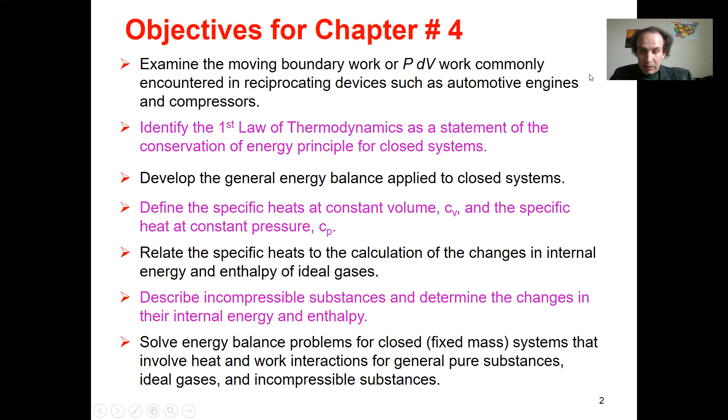So what you must remember, what's the classical mistake? If you identified state 1, you still know nothing about state 2 and other states. You should solve this problem from the very beginning for state 2, state 3, and so on. Please don't confuse. Read the text body and try to identify. So that's what we did in chapter 4. In chapter 4, we employ the first law to a closed system and solve some problems.

So how does the first law look? I recall, we simply say that it's energy conservation. For a closed system, mass cannot go in and out. So we say that energy change in a system is energy propagating through a boundary. And it can go through what? Through heat and work. Remember, heat is something related to temperature difference, and work is everything which is not heat. This is our definition in thermodynamics.

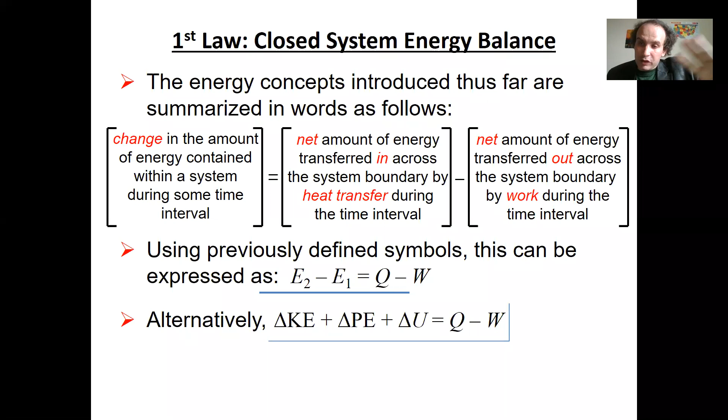We don't talk about boundary work here. We talk about work in general. It can be stirring work. It can be an electric heater. It can be a mixer, any kind of work. Remember the sign convention, Q minus W. If you get passive voice and active voice, classical mistake. Q is positive, W is negative here.

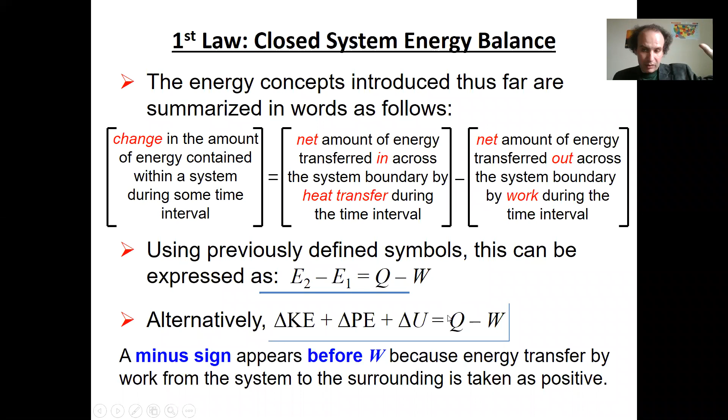If heat goes into the system, it's positive. If work is done on the system, it's negative. If work is done by the system, it's positive. If heat is released from the system, it's negative. Please remember. In differential form, it looks like this, right? So that's what I request you to remember. Yes, there are some questions I will address.

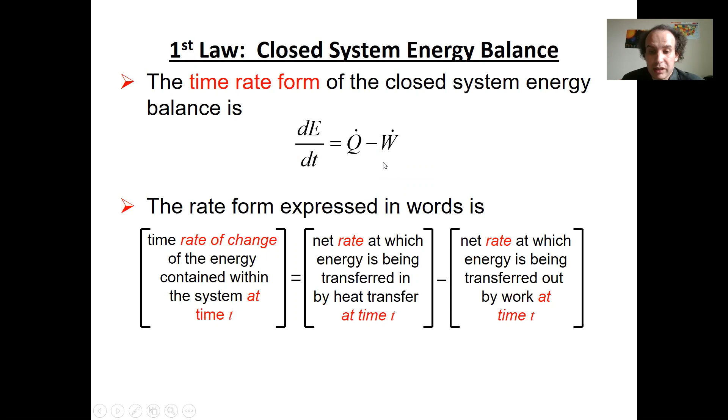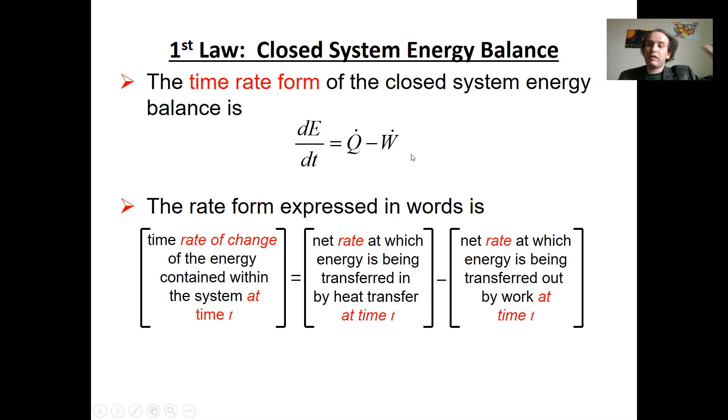So I want to go briefly through these basics, and then we will talk a little bit more about the exam, and I can address some of your questions. So that is the first law for a closed system, right? That's how it looks. Again, I recall here W is work, and it can be electrical work, it can be any kind of work, plus boundary work. And boundary work is one of your major focuses here, when you have a piston cylinder assembly, when this piston goes up and down.

So what you remember, again, heat and work are not properties, right? Why are they not properties? Because they don't depend on state, they depend on the process. Like I say, every instant I can ask you how much you have in your pocket, on a bank account. And if you want to share, you can say this amount. But I cannot say how much you spent instantaneously. You don't spend instantaneously. It's a function of time. The same story here. Heat and work, it's what changes with time.

And we are lucky because of this, because there is no conservation of work and there is no conservation of heat. There is only conservation of energy. So heat can be converted into work and work into heat. And that's why we can use it. And that's how our whole manufacturing works, how the steam machine works. We manage to convert heat to produce work.

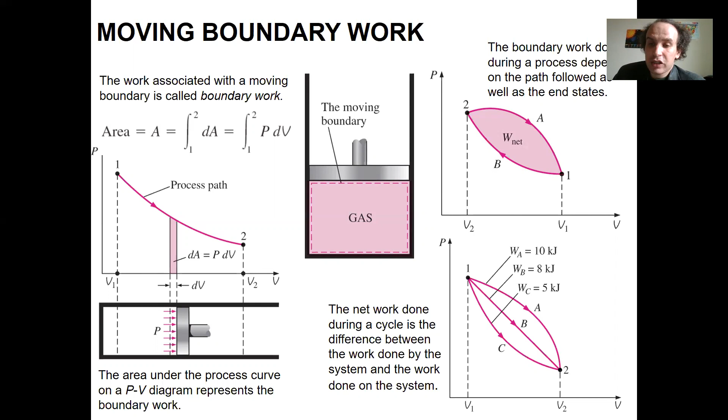Now, so this is one equation that we consider. We discussed several equations, right? So another equation, how the equation of the process looks. And we discussed polytropic processes. So what is polytropic? It's a process which looks like this: PV to the power n is constant. Why do we talk about polytropic processes? For two reasons. One, because it's mathematically nice, it's easy to integrate. If you calculate boundary work, it's easy to integrate this polytropic. True?

Second, because most of the simplified processes we deal with, iso processes, are polytropic. So in this equation, n is what we call the polytropic index. It's some constant, it can be arbitrary. It can be 0, it can be negative, it can be 100, it can be square root of 2, whatever it is. And you should be able to find it, or it will be given in the text. But in fact, most of the processes we deal with are polytropic.

So if n is equal to 0, we have an isobaric process. If n tends to infinity, we have an isochoric process. Now, if n is equal to 1, generally speaking, it's nothing, but if you have an ideal gas, it will be an isothermal process. And remember, when we talk about specific heats, again for ideal gas only, if n is equal to k, Cp over Cv, it will be adiabatic. So please remember how to deal with polytropic processes.

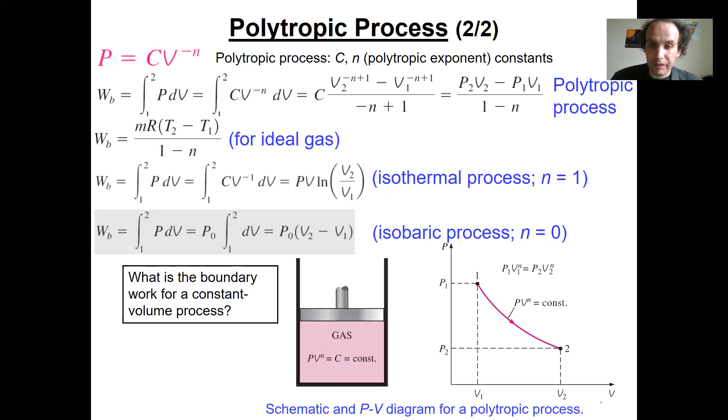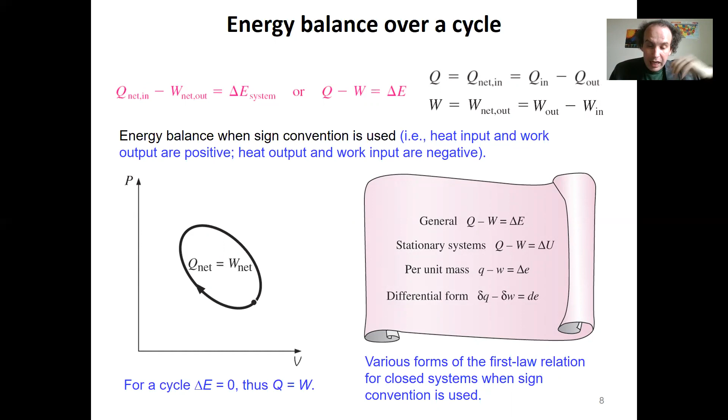Now, if you have a cycle, remember for a closed system, heat transfer over a cycle is equal to work transfer over the cycle. That's important to remember. That's how all our devices work. So there is no separate conservation of heat and work; they are coupled. If you have a power cycle, where the system consumes heat and generates work, like a steam machine, they are both positive. If you have a refrigeration cycle, where you transfer heat and consume work, they are both negative, but they are equal.

Remember, we talk about specific heats. What are specific heats, Cp and Cv? Remember that since heat and work transfer depend on trajectory, it depends what process you look at. And remember, in isobaric and isochoric processes, these are different. So generally speaking, what is specific heat? What is heat capacity? It's how much energy you need to increase or decrease the temperature of 1 unit of mass, or 1 mole, or 1 kilogram by 1 degree.

And remember, Cp and Cv are different. Remember how we define it. And basically remember that we classically derive why we talk about Cp and Cv. Because there is a nice expression that Cv is given by the internal energy derivative, Cp is given by the enthalpy derivative, right? And why is it nice? Because enthalpy and internal energy specific values are in your tables. They are properties, which makes Cv and Cp also properties.

They also depend on state. They are not functions of the process, so they are tabulated. You can get them from the tables. And we discussed many things, how to deal with it. And remember, for ideal gas, we have the classical, very nice Mayer relation. So Cp minus Cv is equal to R.

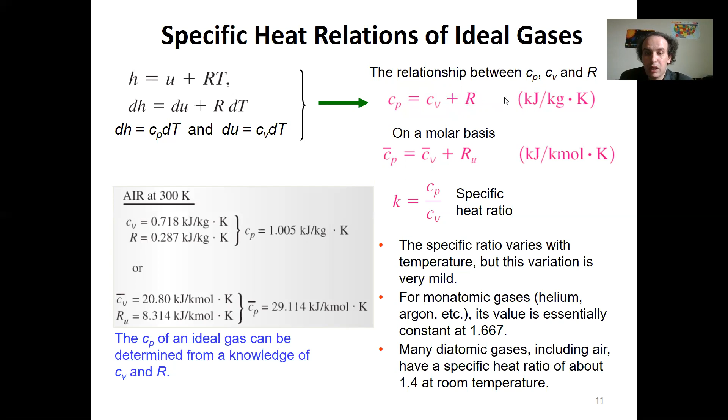If you talk about solids and liquids, this is not the case. For solids and liquids, remember, it will be something like this: Cp is about equal to Cv. That was chapter 4. And then we started chapter 5. And what was chapter 5? Chapter 5 was the extension to open systems.

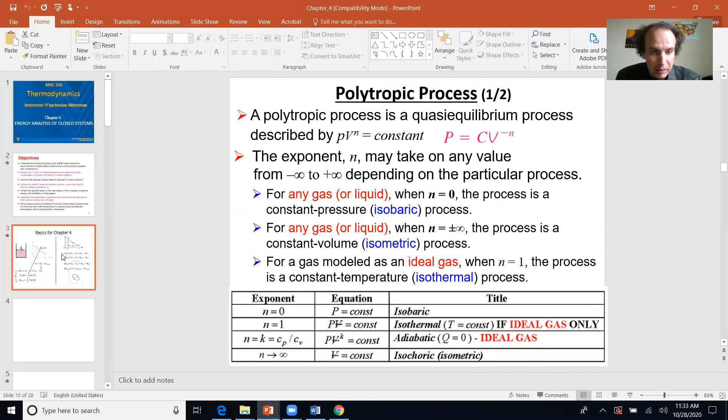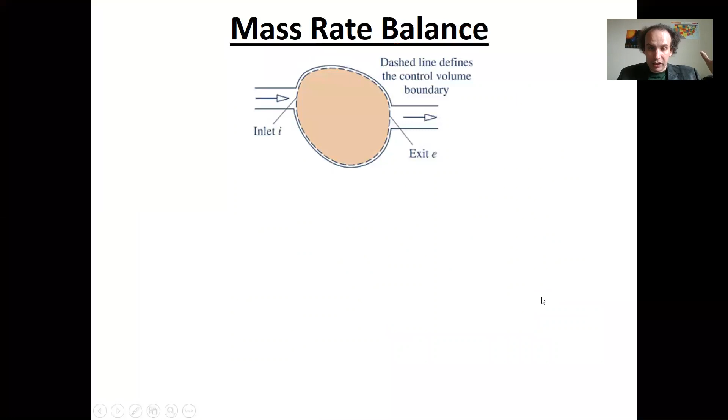So now your basic equations that you deal with, right? I can actually show it like this. Remember when we started chapter 4, I started with the following. I told you, we have this set of equations: energy balance, some kind of polytropic equation, and the equation for work done. So this first equation will not work if you talk about an open system. In an open system, it will be something else, a different first law, different equations. Why? Because there will be mass transfer.

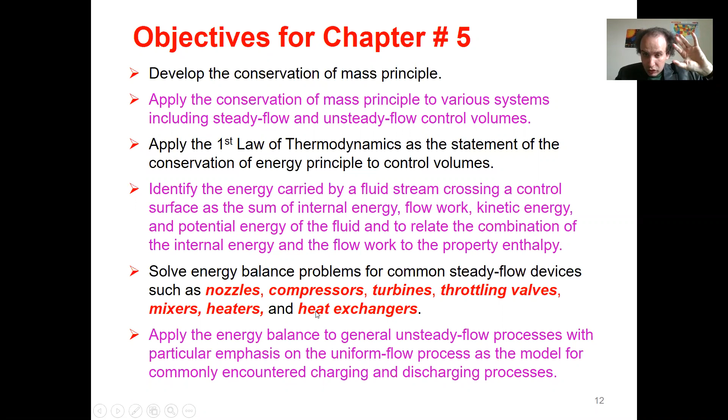So what was our strategy in chapter 5? We developed this new equation and then we employed it for the devices we consider. What devices have we considered so far? Nozzles, diffusers, compressors, turbines, throttling valves, mixers, heat exchangers, whatever it is. Remember this. So that was our strategy. So we have a device like this. We have inlet and outlet. We have mass flow rate.

So remember our basic equation. This is your equation for mass flow rate, how it looks, right? Inlet and outlet. Again, if you come back to a closed system, what does it mean? All this will be 0 and your equation will be that the mass is constant. Trivial but true equation. Remember another formula that you must remember. Here they are. Mass flow rate is like this, right? Mass flow rate is coupled to volumetric flow rate. And basically mass flow rate is conserved.

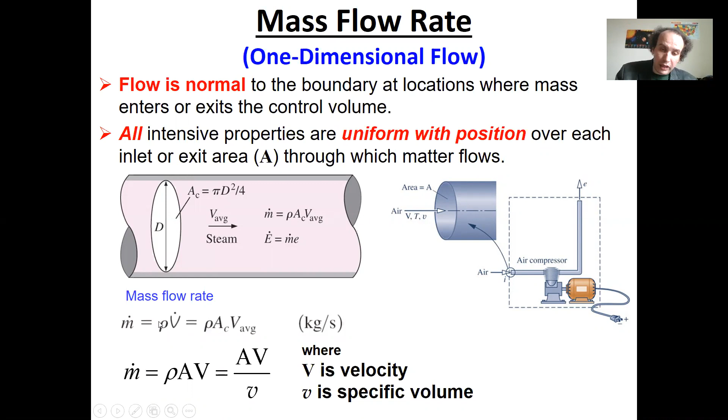Again, remember, volumetric flow rate is not conserved. Mass flow rate is. So basically, if density is constant, you just conserve volumetric flow rate. In the general case, don't use it, use this formula. And here are different expressions. Now, key point. We talk about moving flow, right? That's a very illustrative example. What will be the energy for moving flow and non-moving flow. And what is the extra term here? The extra term here is this PV term. Remember, I told you, it's the work you need to bring in or move out your vessel with water.

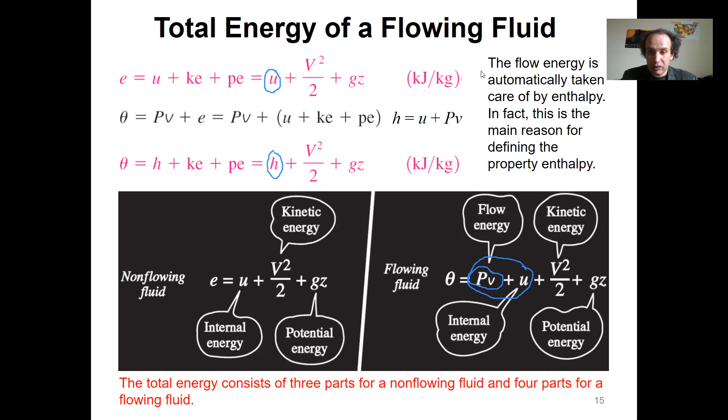What did we do next? We simply wrote down the balance equation. So we say that, again, energy cannot be destroyed or generated. Energy change of a system is what? It's energy coming through heat, plus or minus energy coming through mass, and energy coming through work. That's it. And then we came to this one, and then we derived. In this equation, we realize that your work, remember what is work here?

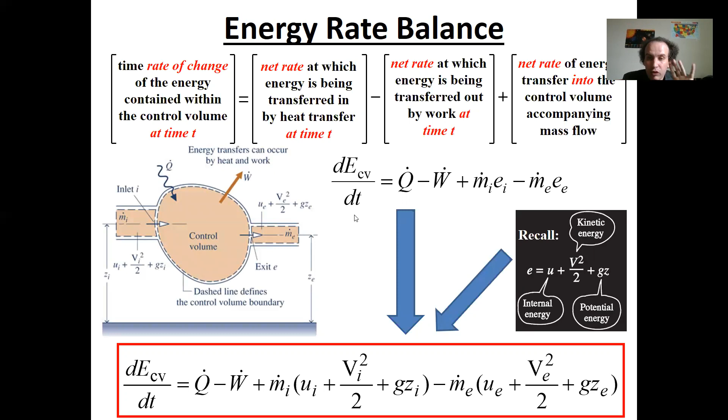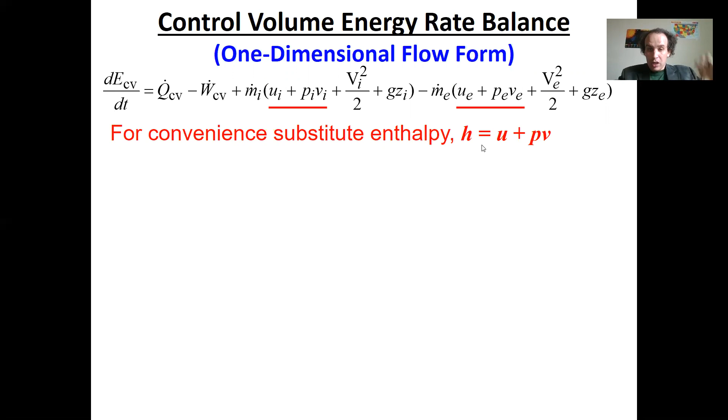Why do I show this derivation now? Because I want you to understand where this equation comes from, so you never confuse it. And basically we managed to write it like this, and these terms show you enthalpy. So it is the enthalpy balance equation, and eventually it was like this. So that is your major equation that you write here in the red square, in the red rectangle. So basically it's enthalpy balance.

Recall, what is enthalpy? Enthalpy is like adjusted gross income. It's not something that exists. Energy exists in reality. It's something in your pocket. Enthalpy does not exist in reality. Enthalpy is a combination of U and PV, flow work and internal energy, that helps you to solve the problem. But it's a very helpful item.

And in fact, you may see here, this equation is what? This equation is actually the enthalpy balance equation. Especially, remember, when you have steady flows, when you don't have this term, only enthalpy is conserved. For all steady cases, it was enthalpy balance. Energy and enthalpy come together only for the non-steady case. Remember this, right? So for each particular case, you write down this equation and see what's going on. For nozzles, diffusers, throttling valves, whatever it is.

Correct? Read the text body. Sometimes your equation will be simplified. For instance, it may be adiabatic, so there will be no heat. It may be steady, there will be no left term. If there is no work, there will be no this term. Very often you can neglect kinetic and potential energy, so there will be no these specific terms. So please pay attention. But if it's not stated, if these values are presented, you should account for them.

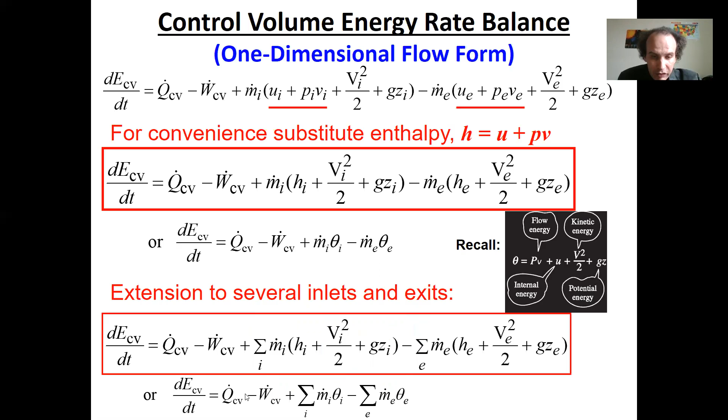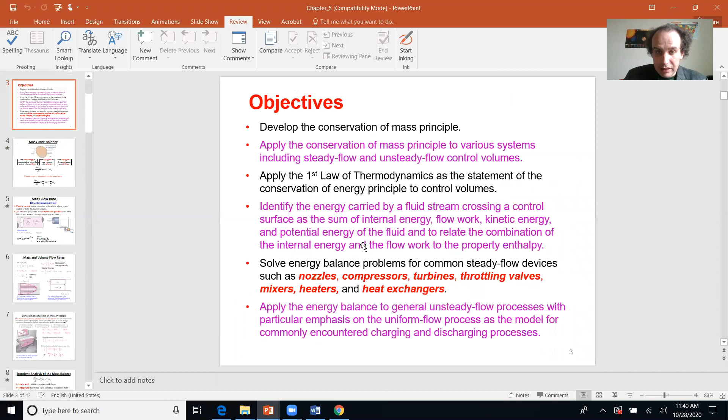So that's what we considered, and basically that was the idea of chapter 5. In chapter 5, if you remember, we just wrote down our basic equations, and then we went through all the examples. So for instance, when you solve a problem like this, here are your basic equations, right? You have an equation for mass balance, an equation for mass flow rates, and an equation for energy balance. Write them down, simplify, and solve. That's what you're going to do.

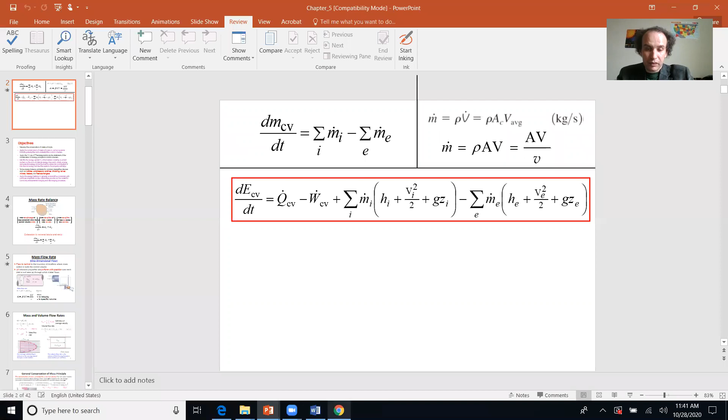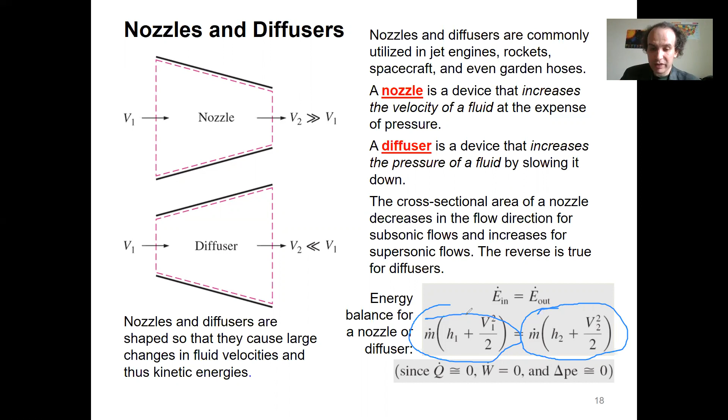So in particular, what we considered. So basically, what we discussed, nozzle and diffuser. For nozzle and diffuser, typically you neglect most of the terms. So you have like this. You have this equation is equal to this, right? So in fact, you have balance between enthalpy and kinetic energy, specific enthalpy and specific kinetic energy. Again, remember, multiply by 1,000 when you are here. So that's what you may solve.

For turbines, compressors, pumps it's a little bit different. For them, what you have? If you have a device like this, here work input and work output is of major importance. So make sure you understand and calculate. Yes, and please remember the following. Work done by turbine will be positive. Work done on compressor will be negative if you calculate it properly. So basically, formulas are the same, mathematics is the same back to sign, but physics is opposite, right?

Yeah, the question, meter squared over second squared, no. Meter squared over second squared is joule per kilogram, not kilojoule per kilogram. If you see our chart now that I'm talking, meter squared over second squared is joule per kilogram, not kilojoule per kilogram. To get kilojoule per kilogram, you should divide this value by 1,000. And we considered this, yes, because joule is Newton meter. That's why we had chapter 1 when we discussed it.

And to realize it, remember that if you had a problem with velocity of 200 meters per second in a nozzle, right? It's very big velocity. It's almost sound speed. V squared over 2 will be what? It will be 40,000 over 2. It will be 20,000. But it will be 20,000 joule per kilogram, which is only 20 kilojoule per kilogram. So it will be a small piece of enthalpy you have. And that's important. That's why we can use steam machines. That's why steam is very, very strong.

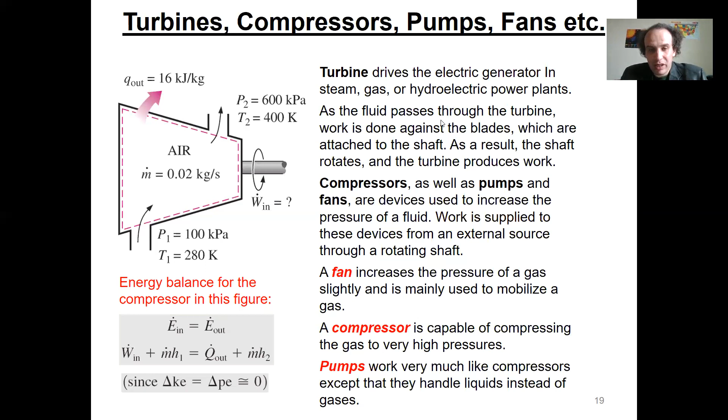Kilojoules and joules. For throttling valves, again, your device is quite simple. It's very nice for throttling, that you will simply have that H1 is equal to H2. So here it's not actually balance, it's conservation of enthalpy. It's nice to consider. But what happened in throttling valve? It's actually distribution between internal energy and flow work. You submit flow work into internal energy and vice versa. And remember that for ideal gas, it will not happen. For ideal gas, H and U are all functions of temperature. So ideal throttling valve does not see ideal gas because particles of zero size are not throttled.

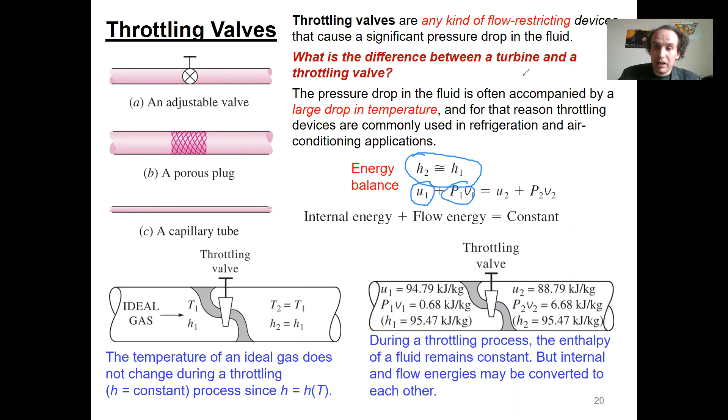And that's why in the fridge, you have what? In the fridge, you have typically throttling valves for cooling, and it would not ever work based on ideal gas. We have a problem how temperature changes, right? That's how a refrigerator works. So that's why you need Freon or water in your refrigerator. Does it make sense? So that's it.

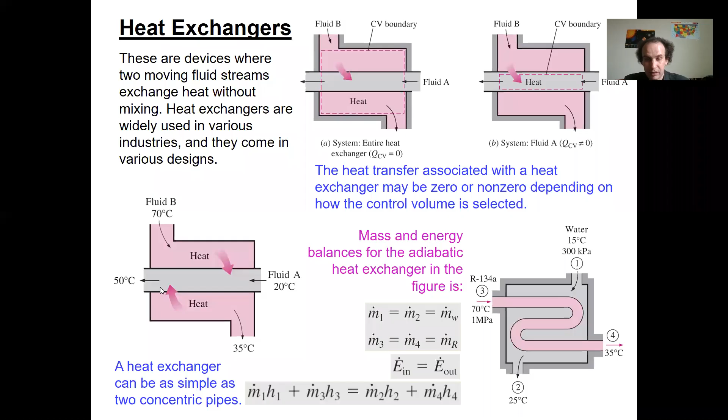Basically, then we discussed mixers and heat exchangers, remember them. And remember the difference that in a mixer, you mix the flows. In a heat exchanger, you keep two or more separate flows. And they may really exchange heat as we discussed. So if you have fluid A and fluid B, at the end fluid B can be colder than fluid A, we discussed, right? So basically that's it.

So what you should remember about your exam? People ask some questions, you can keep asking. So yes, good. It was a good question. How will the exam be? The exam will resemble your homework. It will resemble exam 1. It will be 4 or 5 big problems. Again, you start with multiple choice questions.

Then there will be some simple calculation questions, and then there will be 2 or 3 big problems with subtasks. Again, yes, it was a good question. I expect there will be 1 correct answer for multiple choice questions. 1 correct answer, so you don't waste time. You are recommended to do this assignment 1 by 1 because that will save your time. Please realize that you are not expected to waste time.

You should have your brain with you, but you're not expected to think long on a problem. So if you spend 5-10 minutes and you cannot clarify it, something goes wrong. Because you should be ready to write it down and it should be straightforward. You don't have time for this. So if you forget tables, again, remember about tables. Remember how to use tables.

Remember that classical mistake that you confuse tables. You confuse superheated and saturated. You confuse freon with H2O. Ideal gases: don't confuse ideal gas with other items. If you use water and freon, most likely this is not ideal gas, and don't use the ideal gas law to describe them. It's a really classical and very serious mistake. Simple calculation. Yes, in your exams, there are problems very similar to what we are talking about here. So that's it.